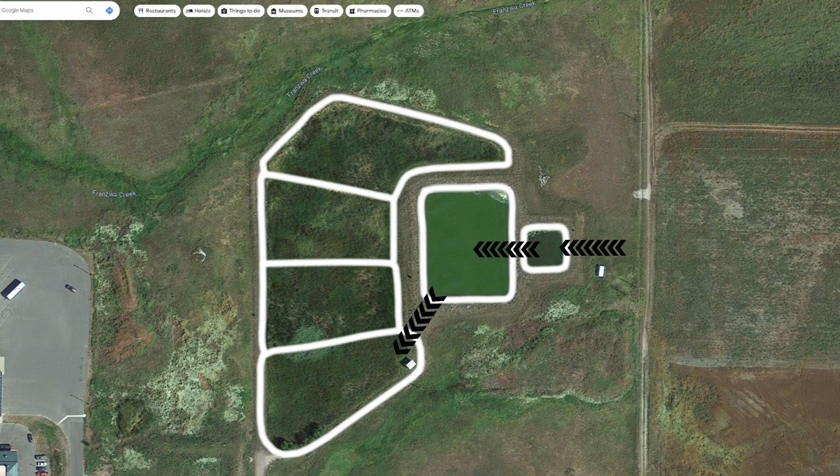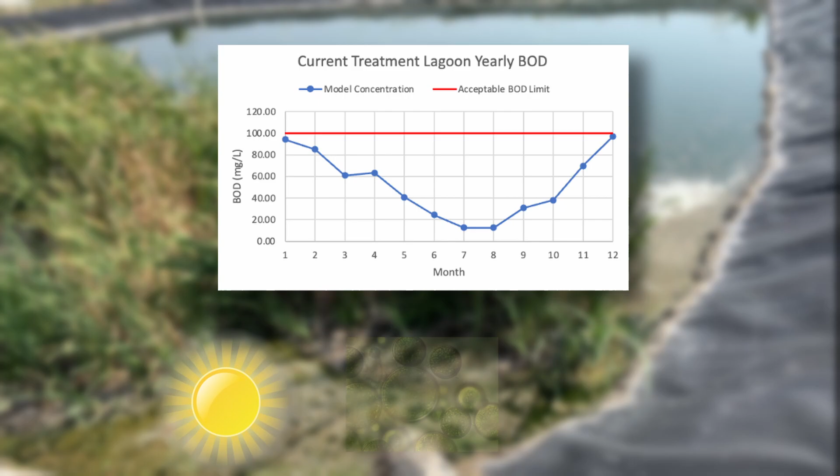Treatment of the wastewater begins in the treatment lagoon, which serves to reduce the biological oxygen demand of the incoming waste through a process which uses sunlight, algae, and aerobic bacteria to reduce BOD below the acceptable threshold. After moving from the treatment lagoon, treatment processes continue in the constructed wetlands, which are a cost effective and relatively low maintenance treatment system that uses natural processes involving wetland vegetation and soils to improve water quality.

All of the influent entering the wetlands must be handled through a combination of infiltration through the wetland soils and evapotranspiration using the planted vegetation, with no allowable discharge out of the system. Presently, the system is equipped to handle influent from the Mistequa Casino and its surrounding buildings, but due to the construction of a hotel in the area, flows are expected to increase to 25,600 gallons per day, which necessitates an evaluation of the current system to determine the potential expansion needed to accommodate the proposed flow increase.

To do this, 3 primary alternatives were evaluated. These include an expansion of the existing facility through increasing wetland area, increasing storage lagoon volume, or a combined approach in which both are expanded. In order to determine which of these options is most effective in addressing the increased demand, a comprehensive mass balance was developed, in this case referring to inflows and outflows from the lagoons and constructed wetland.

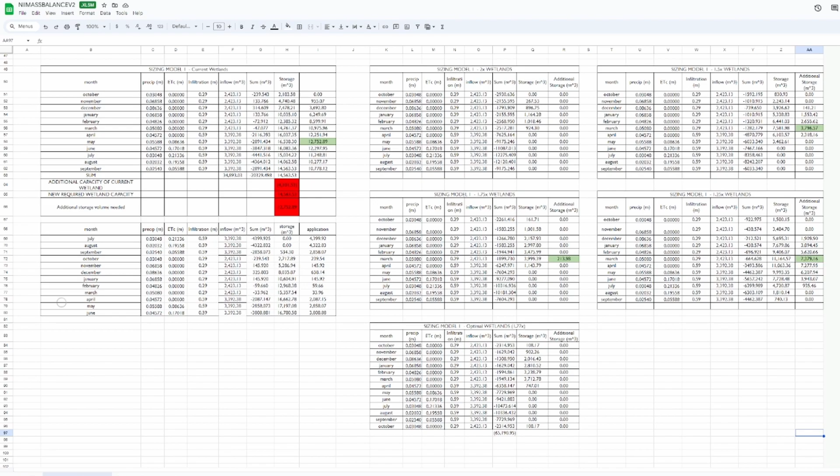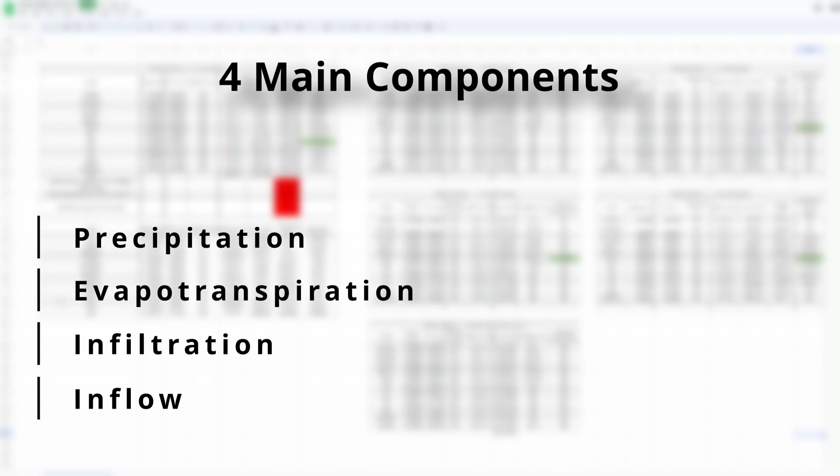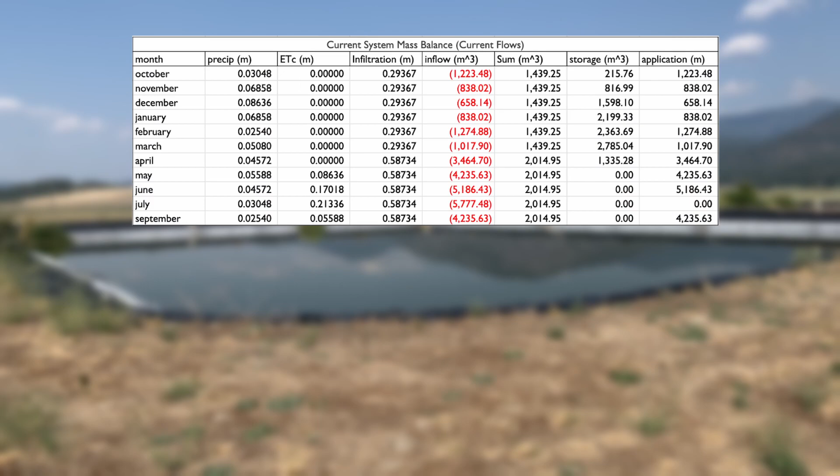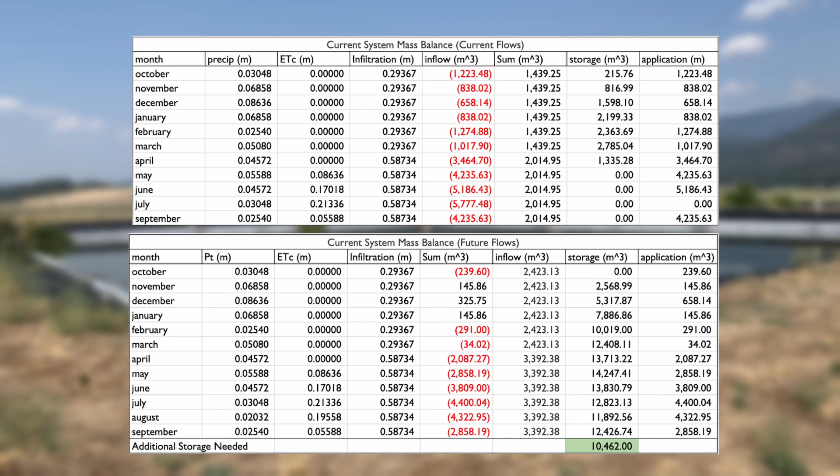4 main components contribute to this balance, including precipitation, evapotranspiration, infiltration, and inflow, each of which vary depending on the month of the year. Values in every month for each of these components were assigned based on geotechnical testing data, local precip and ET data, and the projected flow increases. By looking at the relationship between each of these variables, the current and future performance of the system can be evaluated. The model demonstrates that while the current system functions as expected, if the capacity of the facility is not expanded, system failure in the form of overflows and discharge will occur.

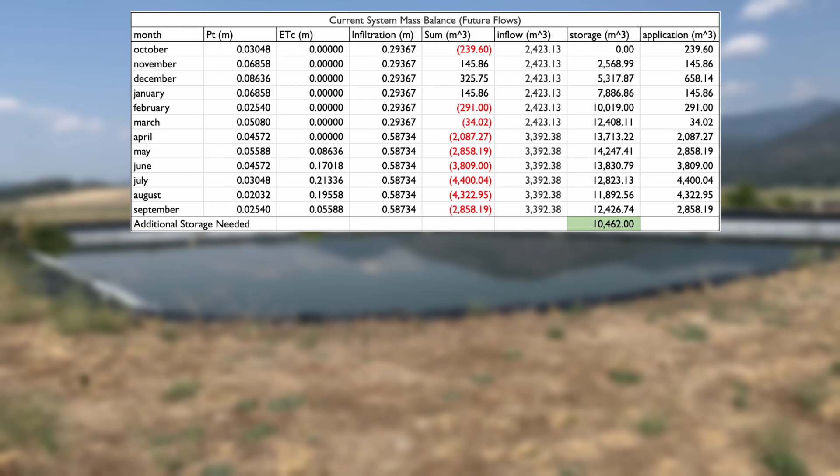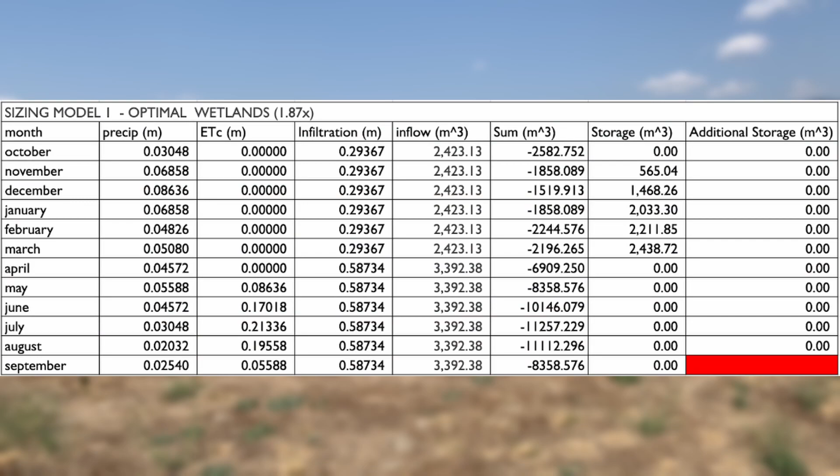By modifying values in the model to reflect each of the 3 expansion propositions, it was first determined that the alternative of a pure storage expansion would not be sufficient to accommodate the future demand, due to the infiltrative capacity of the wetlands being overwhelmed. The alternative of a combined approach demonstrated that a wetland expansion factor of 1.6 and a storage expansion factor of 2 would be sufficient, as would the alternative of a pure wetland expansion factor of 1.87.

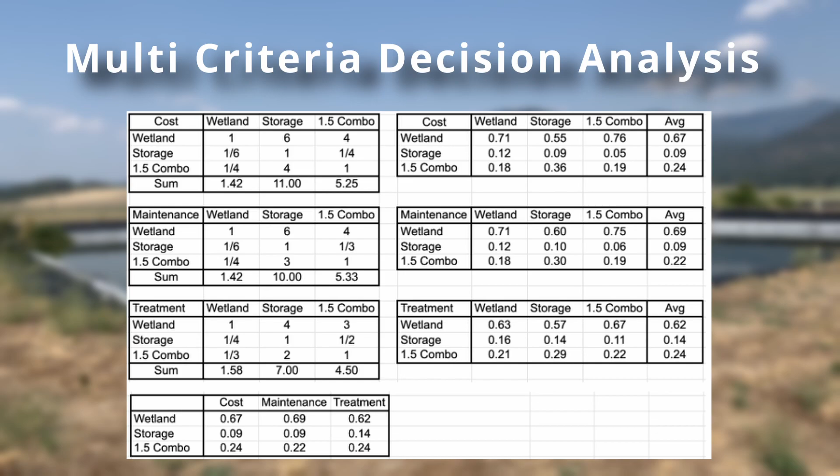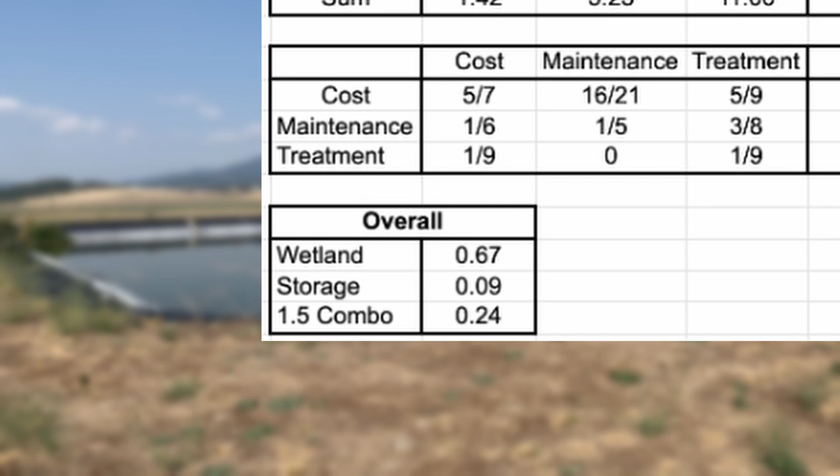To select which of these alternatives to pursue for the final design, a multi-criteria decision analysis, or MCDA, was implemented, where the alternatives were weighed against each other using parameters of cost, ease of maintenance, and treatment efficiency. For all parameters, each criteria received a ranking from 1 to 9 when compared to the other options. Overall, the MCDA indicated a preference for alternative A, followed by alternative C, and then alternative B, with scores of 0.67, 0.24, and 0.09 respectively. Therefore, alternative A, the 1.87 times wetland expansion, was selected.

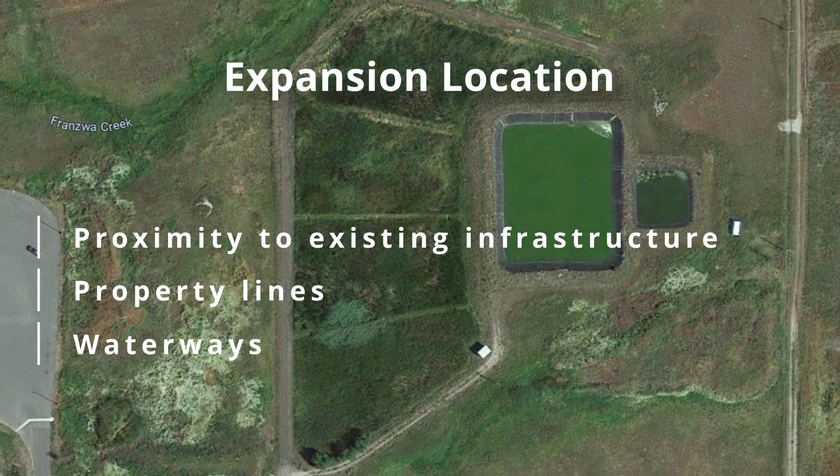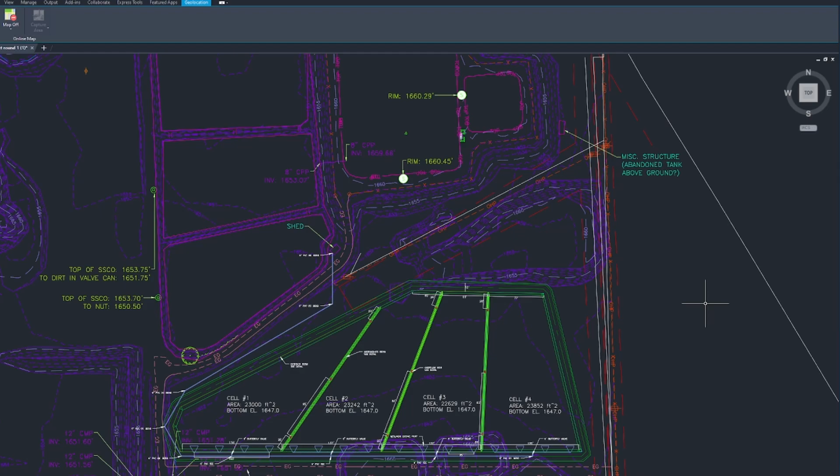In determining the exact location this expansion would occupy, proximity to existing infrastructure, property lines, and waterways were considered. With these criteria, it was determined that a location just south of the current plant would be optimal. The total expansion area was then divided into 4 cells within the selected zone, which roughly equaled the area of each current cell. Requirements for distance between dosing ports, pipe connections, berm heights, and associated dimensions were all modeled within Civil 3D. Detailed specifications, such as elevations, areas, and component locations and labels, are all also included in the final CAD model.

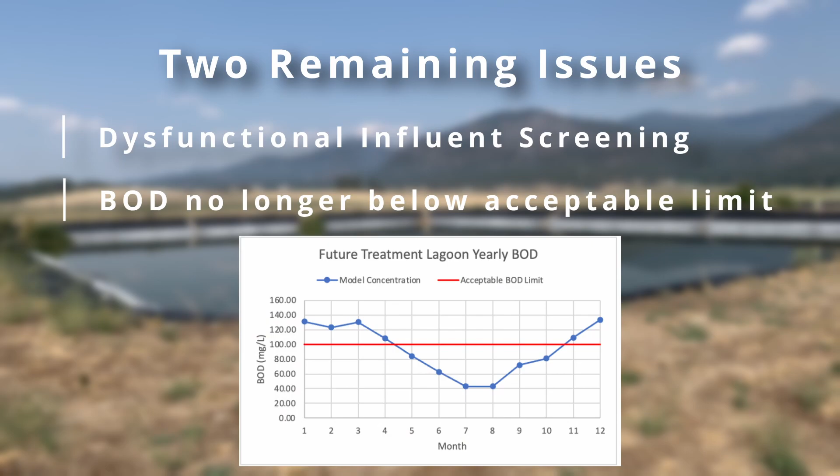This system faces 2 additional issues that need to be addressed. The first of these is that the current influent screening unit is not operational, which allows for excess solids to enter the facility, reducing its overall efficiency. The second is that due to increased flows, the detention time in the treatment lagoon will be reduced such that the allowable BOD concentration of 100 milligrams per liter is no longer met.

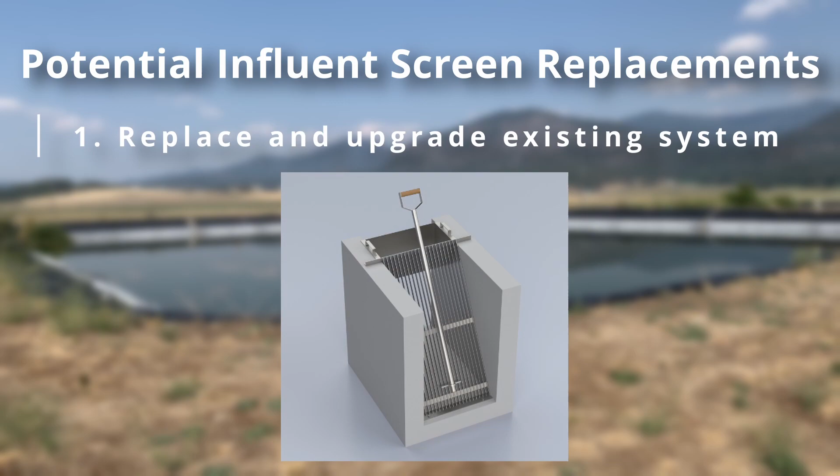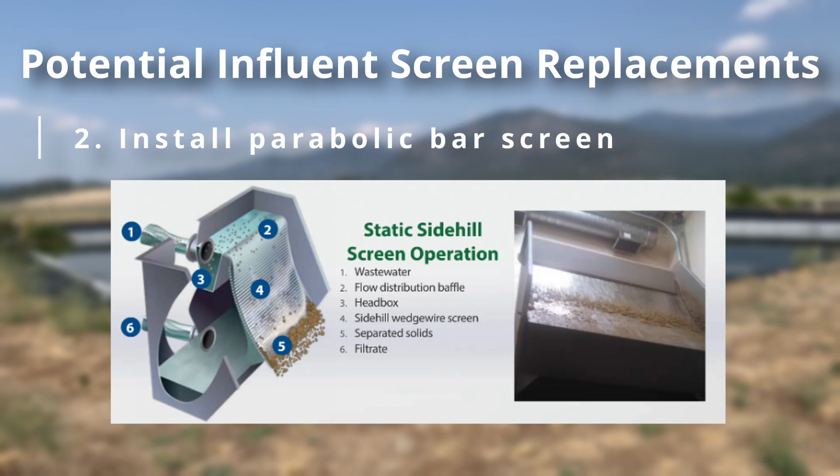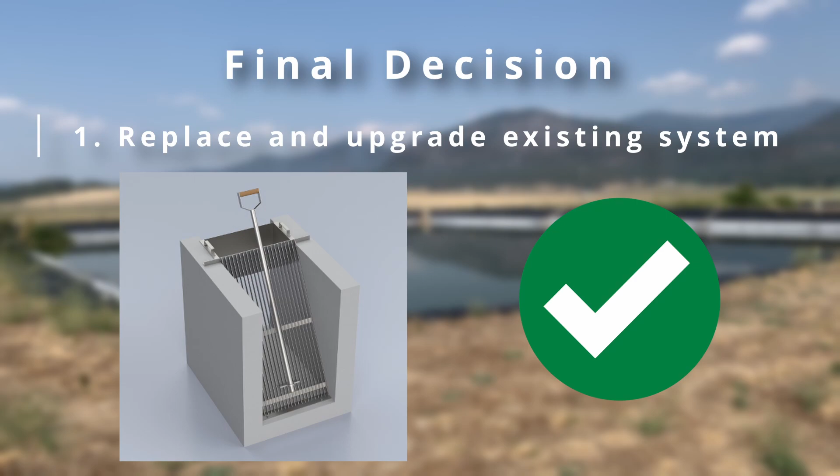To address the dysfunctional influent screen, 3 main options were reviewed. 1. Replacing the existing bar rack system with a finer bar screen to allow fewer solids through, as well as installing bristle cleaners and a collection bin to prevent buildup and streamline maintenance. 2. Installing a parabolic bar screen which has no moving parts and also requires very little maintenance, though has a higher upfront cost. And 3. Installing a drum screen, which has several advantages, including additional BOD removal, but requires electricity to run and a high initial expense. Due to the upfront cost and resource requirements of alternate systems, replacing and upgrading the current bar rack system was chosen.

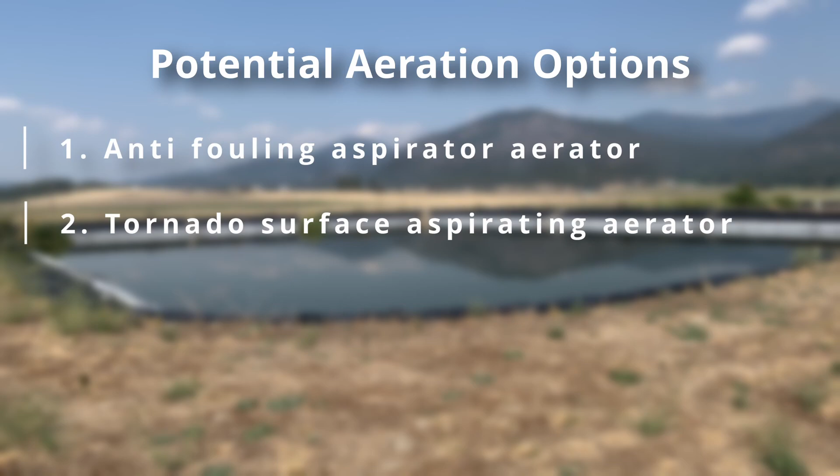As for the issue of meeting the allowable BOD requirement, a variety of systems that introduce atmospheric oxygen into the lagoon in the form of aeration were examined. These included an anti fouling aspirator aerator, tornado surface aspirating aerator, and a floating brush aerator. Each of these options require comparable maintenance and are capable of reducing BOD concentrations back under the acceptable limit. So the primary deciding factor was the cost to performance ratio of each system, in which case the anti fouling aspirator aerator won out.

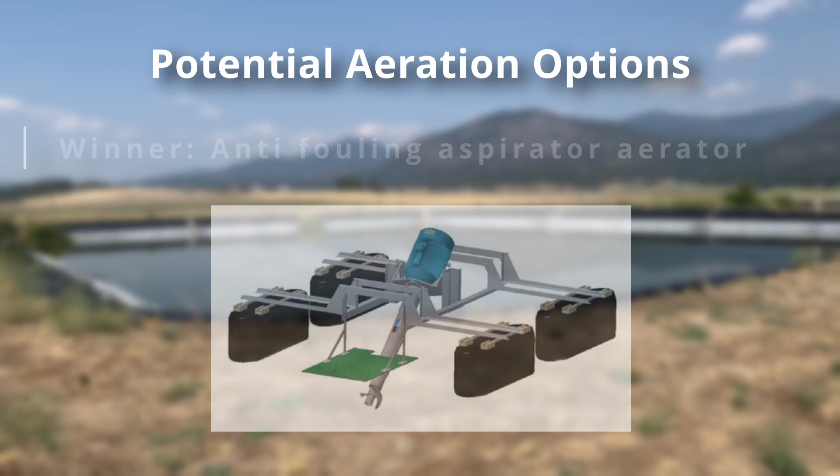If this combination of facility expansion, influent screening replacement, and aeration solution is implemented, Natural Infiltration Initiative is confident that the Mistequa wastewater treatment facility will be prepared to handle the projected demand increase by a comfortable margin, and is pleased to have been given the opportunity to provide our services.